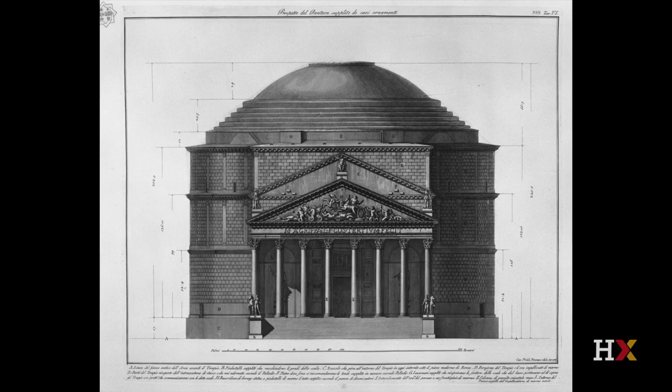It's an unfinished project. You can see this by the picture of the facade. There was perhaps a projected dome, which was supposed to be hemispherical, and it's a shape that was meant, therefore, to mimic the Pantheon in Rome, and therefore allude to the classical past in a very grandiose way. That dome was never built, and Alberti's facade was never finished. This is in large part because of the question of the patron. The patron's fortunes went awry. He was actually excommunicated in 1460, so a mere 6 years after the facade was for the most part erected, and he died in 1468.

Now, if you look at the facade, you'll see that to either side of the entrance there are two blind arcades. We know that these were originally meant to house a sarcophagus for Malatesta as well as another one for his wife, although there's some disagreement about this. But the idea adds consistency to the explanation offered by Wittkower of a united whole, of a united monumental and commemorative purpose for the whole.

What's interesting here is to do what Wittkower didn't do, to think about the context of this. For example, the Pope at the time thought this was a blasphemous structure, a blasphemous idea. He decided that to plaster a classical facade on this church, to turn it into an evocation of the Pantheon, was actually turning the church into something that was, quote, and this is the Pope himself, full of pagan gods and profane things, so full of pagan images that it seems like a temple for the worshippers of demons. This is obviously a conflicted commission. Again, Wittkower's not interested in these issues.

What he sees in the Tempio is the first in a sequence of 4 churches in which Alberti is carrying out a systematic investigation of the fusion of classical system or classical principles in Christian buildings. The building poses a problem, and he offers a certain kind of answer or solution. So problem 1: the Tempio, or how to impose a classical aspect onto or over a pre-existing medieval structure. How do you do that?

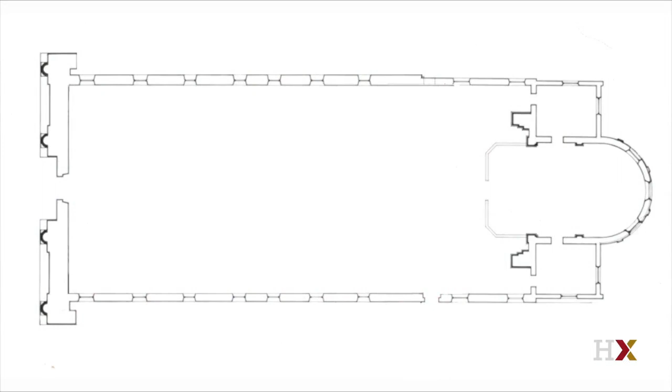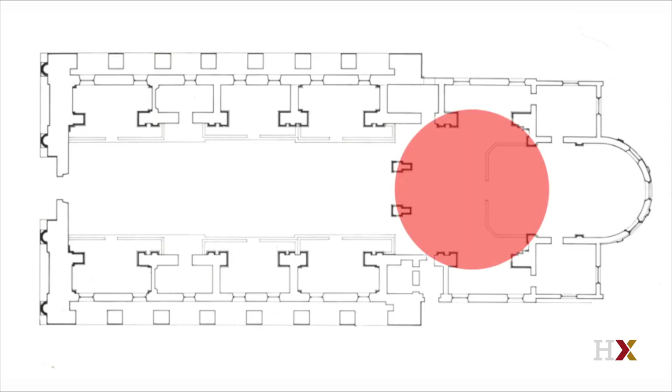Now, if you look at the plan, you'll notice that the original church, conveniently, has a rectangular format. It's a medieval church with a single nave and no side aisles, extending into a large semicircular apse. Now, part of Alberti's plan was to transform this basically simple and straight rectangle by means of a large rotunda that would support a massive dome at the crossing. The nave was meant to be covered over by a barrel vault made of timber, and over this, a pitched roof over the side chapels and the nave.

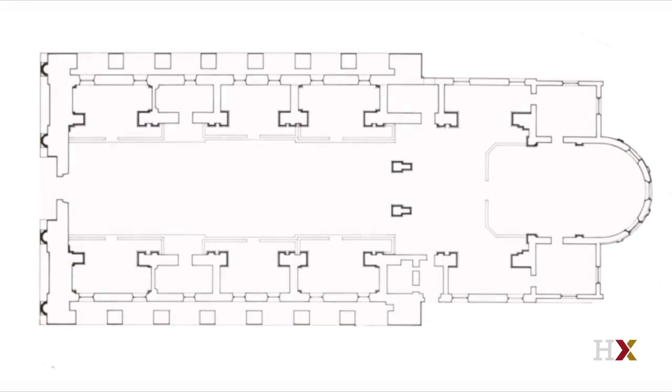One of the things you'll notice about the plan is that the windows are actually unevenly distributed at the sides. And Alberti screens this asymmetry, if you will, with the Roman arches held up by piers, and the whole, as it were, is elevated on a kind of antique-style podium. He's, in other words, putting his own theory into practice.

If we turn to Alberti's own theoretical treatise, in his book 7 on sacred buildings, he writes, quote, "In my opinion, the space taken up by the portico, and indeed the whole temple, should be raised above the level of the city. This will give it a greater air of dignity." This idea of elevating the church, of placing it on a podium, of making it function as the sacred center of an urban context. You see the podium effect here.

What remains of Alberti's design is most visible actually on the outside rather than on the interior. And you also can gather the repercussions of what it means to impose a triumphal arch idea on a church facade. The other important aspect of all of this is that his classical source was local. It's what you see, the arch of the Roman Emperor Augustus. What Alberti is doing here is that he's playing with classical motifs. He's not copying them verbatim.

He keeps the roundels of the arch, he transposes them onto the facade, as well as the relation of the arch, the fluted engaged columns, and the spandrel. The spandrel is actually the space between a curved element and a rectangular boundary. And then he places a triangular pediment over the door, inside of the arch on the facade rather than above it, as you see in the actual arch. The capitals are in the spirit of antiquity and, in the playfulness that we see with Wittkower, completely his invention.

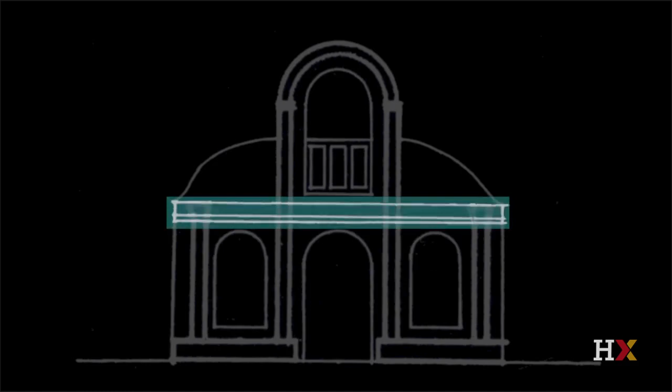What his diagram foregrounds is actually a series of disrupted rhythms, which come from his assessment of the visual essence of the element. The entablatures should, by all logic, create a horizontal barrier between the lower register and above. The interesting thing is that you also expect a vertical continuation, and that's what you see in the central bay with the entrance and that niche or edicula above it. This part accentuates the verticality of the building, not the horizontality of the building.

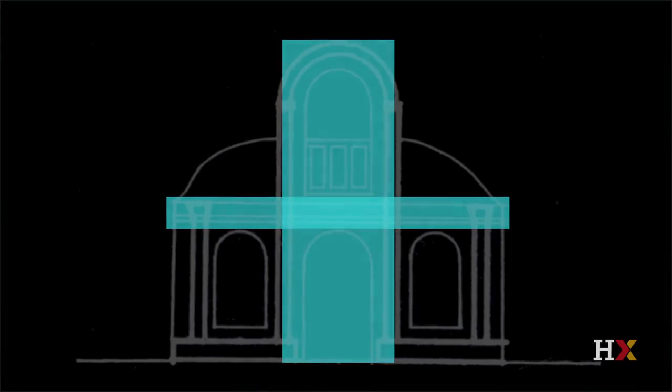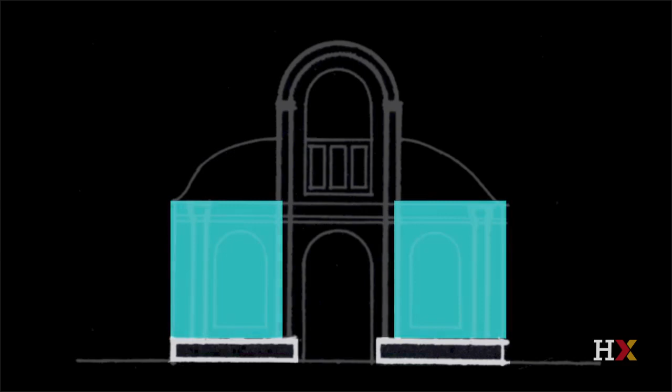What happens here is that fundamentally we are left with a contradiction. While the central vertical thrust remains apparent, it is challenged, according to Wittkower, by the high base, that podium on which all of the columns rest, as well as the side bays, which emphasize a horizontal aspect to the facade. You can see him drawing the lines in bold to emphasize this contradictory state, to prove his point.

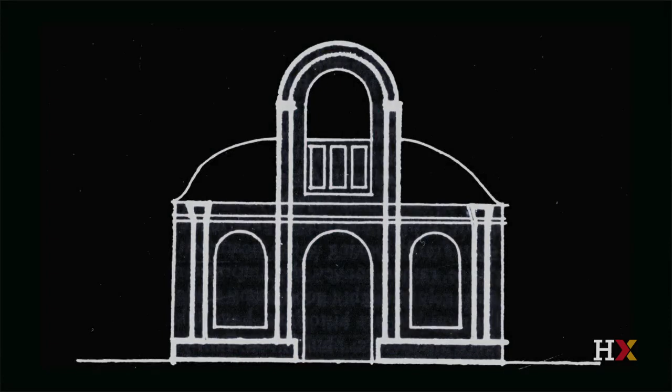The result for Wittkower is that the outer bays are closed off by the common base that links them, but left open at the top. There's nothing above them. There's nothing that closes them off. And according to Wittkower, exactly the opposite happens in the central bay, where there is no podium linking the two central columns, but their verticality is emphasized. Ultimately, for Wittkower, these complicated rhythms of the Tempio's facade leave its quote-unquote unity completely unresolved.

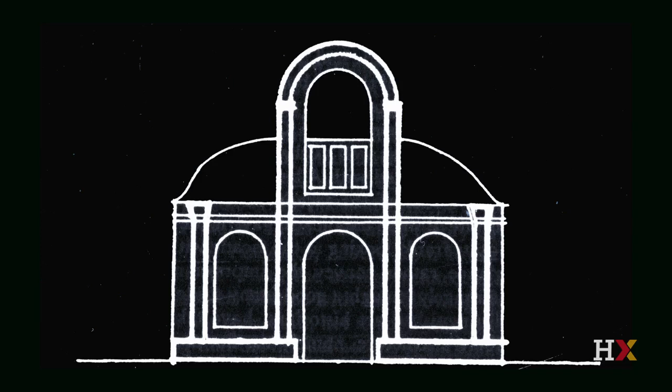And this is the point of the diagram, to show us in the most distilled way possible that Alberti's daring, imaginative, but ultimately failed project was an attempt to resolve two incompatible systems. What does it mean to put a classical envelope on a medieval structure? What does it mean to impose a one-story logic taken from the Roman triumphal arch and impose it on a structure that required a two-story solution? Ultimately, the diagram demonstrates Alberti's attempt to capture an ideal formula.